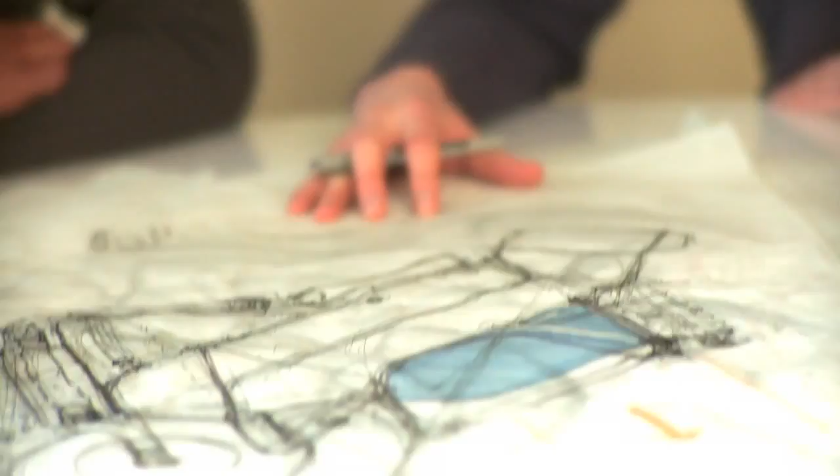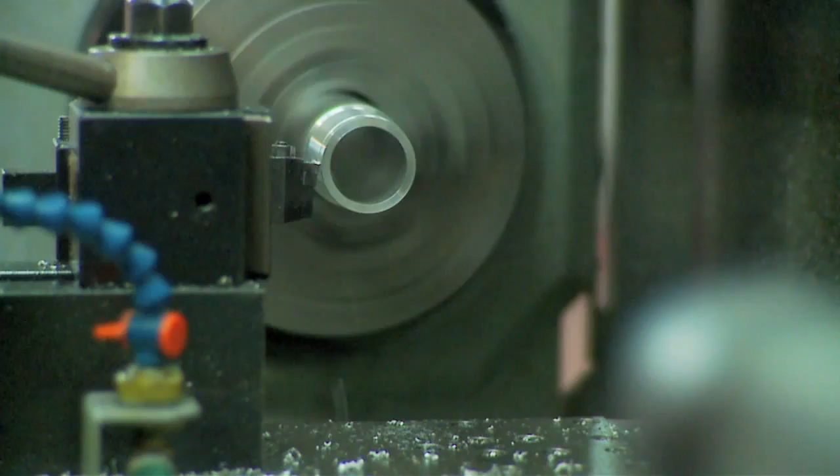The path of being a trailblazer is more difficult regardless of the product. If it's a product that's replacing something of legacy, it's even more difficult. It's not like we can call the company that's been making pistons for 100 years and ask them about the formulation of raw material, the methodology, the heat treating, and all the small refinements they've done over the last 50 years, and ask how we can apply that to batteries. It doesn't apply. At that point, there's a heavy burden on the software, SOLIDWORKS in our case.

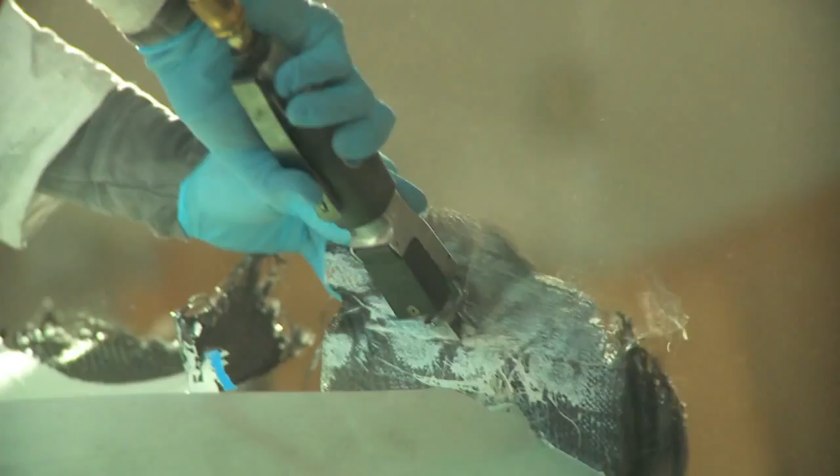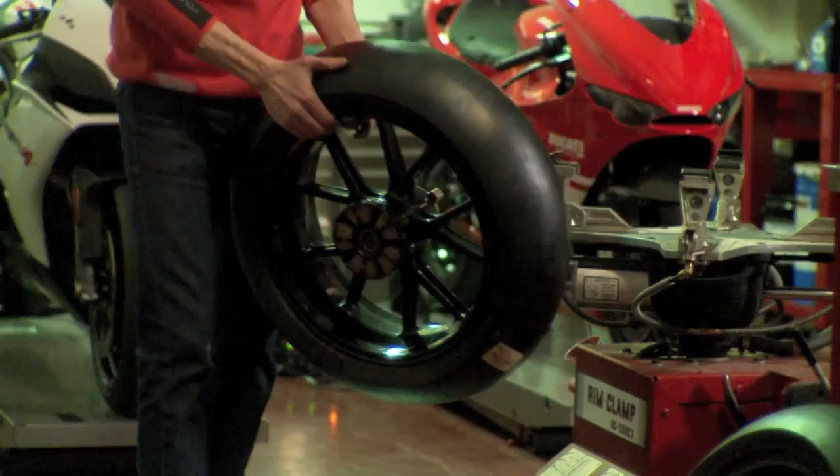It's still important to have some craftsmanship, some handwork. That's part of the process. To me, that's the real art. That's really what we're striving to do, is to keep the hand part engaged, but make it transparent to the overall CAD process.

There's hundreds and hundreds of parts, and thousands of opportunities for failure, and one failure is unacceptable. We have a bit of an audacity. We dream big, think big, and want to take the big step. You need the tools of powerful modeling programs like SOLIDWORKS to do that.

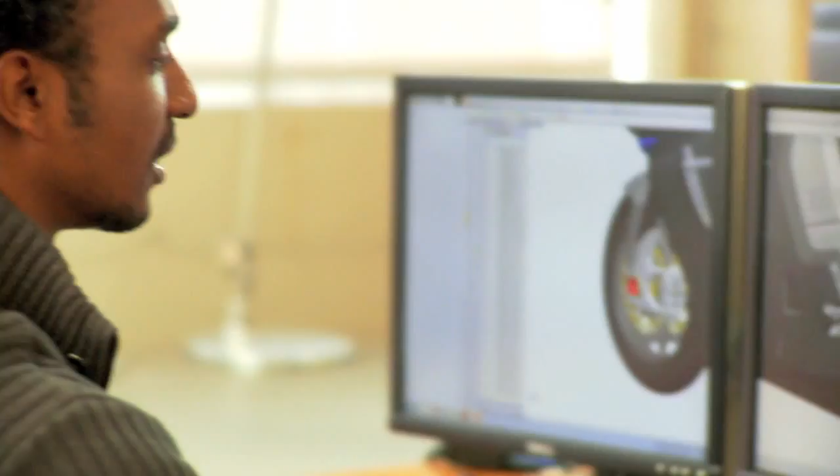Michael came to us and said, listen, we're overweight on the bike. If we're going to win the Isle of Man, we need to get the weight out. We started looking at the big chunks. One of the biggest areas on the bike is the swing arm. We began using the finite element software to really optimize that.

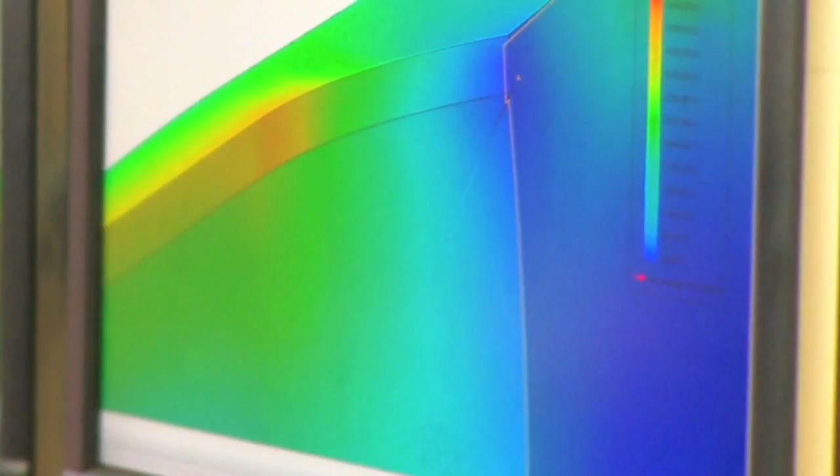We applied loads and constraints to the model. All those dark areas, that's where we needed to remove the meat. So we went in and started carving away. We got 12 pounds out of it and increased the performance of the bike.

Michael approached me and said, I've been thinking about the suspension on the bike and I want to do something novel. I'd like to look into taking the springs and dampers and moving them up to where the tank would be on a normal motorcycle, because we don't have gas, so what are we going to put there, right? So we talked about putting the suspension up there.

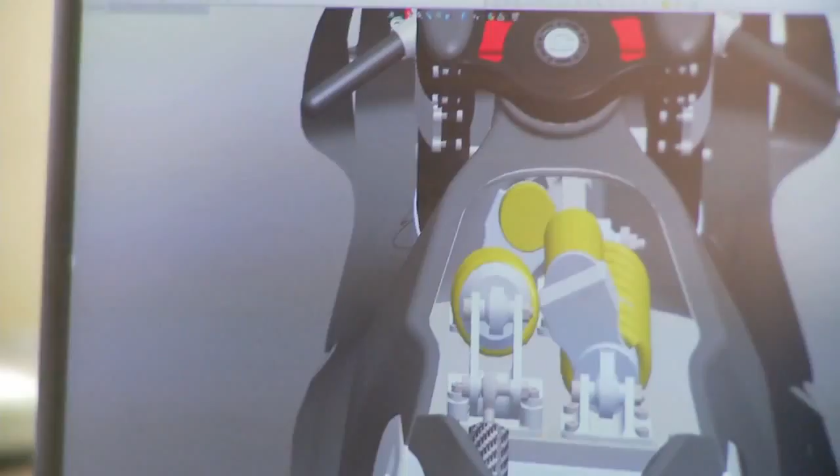The SOLIDWORKS software really helped us approach it very quickly. We started with just basic sketches, figuring out, can we get the geometry to work? Can we get the forces to work? Our bike development time was 4 months.

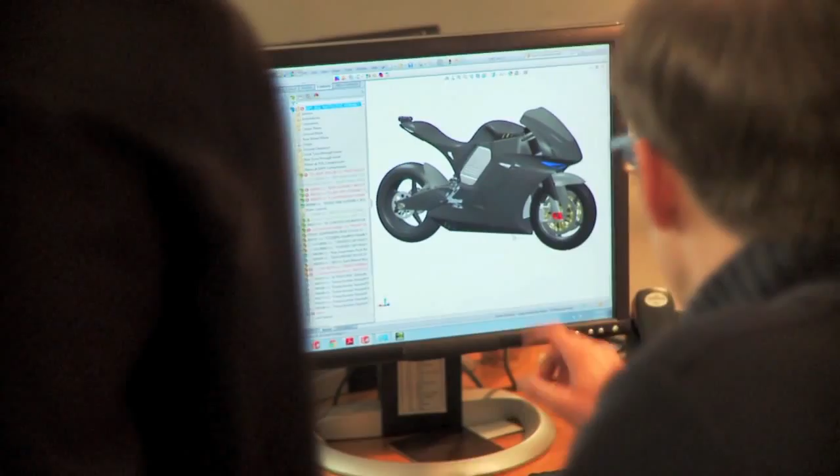There's no way we could have done it without the tools that SOLIDWORKS brought to the table. There's just no way. SOLIDWORKS has allowed us to basically go down this clean sheet path and come out on the other side of it with a bike that literally goes together first try, which is amazing.

The last two years, we had virtually no testing, and the bikes never saw the light of day until they were taken out of the crates on the Isle of Man. I think it's a testament to the ability of our team in using tools like SOLIDWORKS, that we can have that much faith in parts that have never been tested, hand it to a rider and say, go ahead and take on the most challenging and dangerous course in the world.

Last year we won the Isle of Man for the second time, and before MotoCzysz won the Isle of Man, the last American bike to win there was an Indian in 1911. To stand there and see your bike come up the road that some of the greatest racers in history have come up, and cross that finish line, to recognize it as your bike and your rider, it's overwhelming.

It's not to the same degree as having a birth, but it's really close.